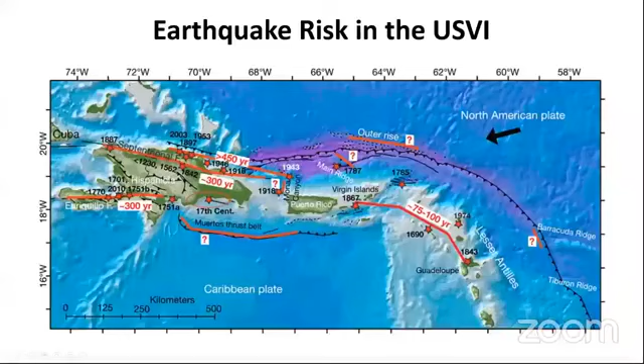So this here is another representation of all the earthquakes that occurred around us, with magnitude greater than 4.5. You see Puerto Rico definitely affected. The Virgin Islands has been affected, and the BVI in particular has been also quite affected. All those little stars and dots represent different earthquakes that occurred.

As you can see here, we've had a lot of earthquakes of magnitude greater than 7 that can be quite devastating. The more recent one that happened in Puerto Rico in 2020 was approximately 6.5. So that earthquake, which caused a lot of damage, is actually not a major earthquake compared to what happened in the past.

What's interesting about these dates is that those earthquakes can create tsunamis. The 1867 earthquake and the 1918 earthquake generated tsunamis that created further havoc on the islands.

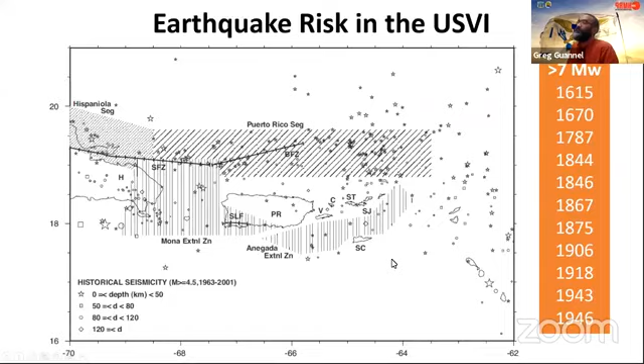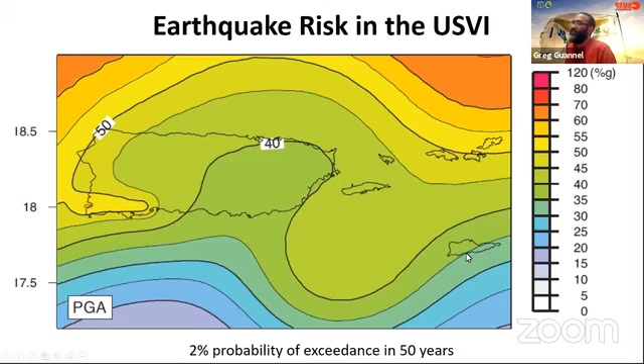So if you don't quite know what that means, let's compare it to the US. This is the map of 10% chance of recurring in 50 years for the United States. The regions in orange and yellow have a PGA of 15, 20, 40.

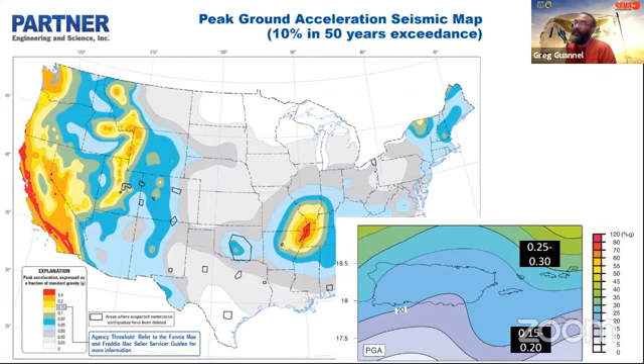We in the VI have 0.15, 0.2, and 0.25, 0.30 for St. Thomas and St. John. So what that means is that we need to look at the yellow to the orange, light yellow to the darker yellow and orange. It's not as bad as some places in California, but it is comparable to a lot of places in California, Washington, and Oregon State. This means that the earthquake risk we have can be quite damaging, especially compared to what has happened in other places in the United States.

Greg, the peak ground acceleration, is that like, what is that on the Richter scale? I will let my colleague, who will give their presentation, address this in a second.

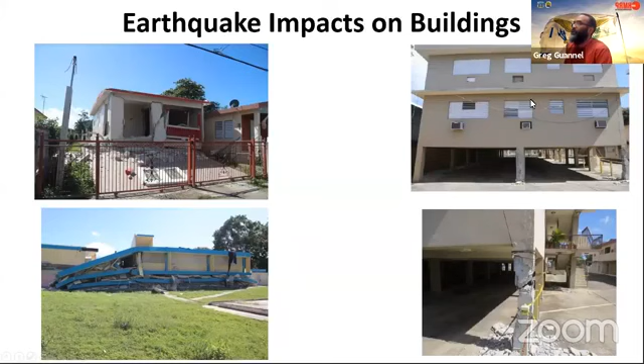So what does that mean in reality? These are pictures that were taken in Puerto Rico after the major earthquake they experienced. You can see the type of damage to houses and buildings, especially those built on stilts. A building can look fine, but the support structure can be quite damaged, as you can see in those pictures.

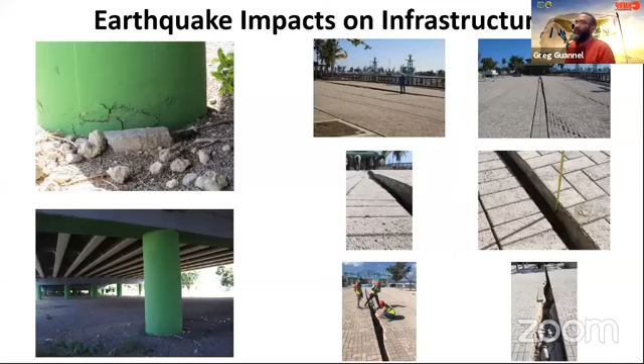It can also happen to infrastructure. Here are the pilings for a highway that are damaged, which will then threaten the integrity of that structure moving forward. These were taken in some public plazas, and you see the type of displacement that occurs, mostly because of the type of soil that was below it. Hopefully my colleagues from Puerto Rico and Trinidad will discuss more how this can happen given the type of soil you have.

So what does that mean for the VI? Well, as I mentioned earlier, we live in a very dangerous zone for earthquakes. Earthquakes have happened in the past, and they can happen anytime—today, tomorrow, or 10 years from now—but they can be quite damaging. When we look around in the VI, we ask questions, and hopefully our guest today will help us start creating answers. We see buildings that are made out of masonry, with support structures that are basically concrete blocks.

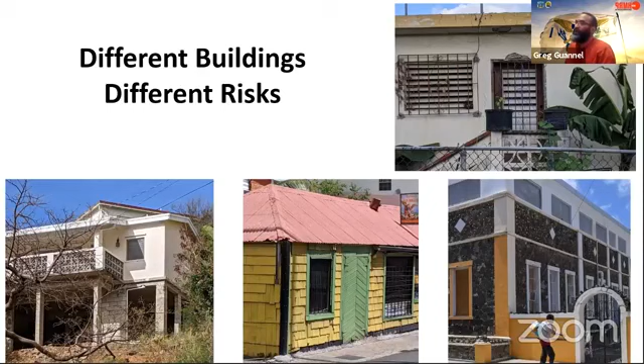From my point of view, that might be a problem, but maybe it's not. We also see structures made of wood, structures made of reinforced concrete, but the reinforced concrete is starting to degrade, probably because of the quality of the masonry when the structure was built. We also have very old structures made out of stone and concrete on top. There are all types of different structures here in the VI, and those have different ability to resist or completely collapse during earthquakes.

We also have very steep terrain in the USVI. This is also not uncommon in parts of Puerto Rico because it's also mountainous. But we probably have a higher percentage of structures on steep slopes on St. Thomas and St. John because that's what our topography is in majority. So you see a lot of multi-story buildings made out of different materials, different quality construction types, built on very steep slopes.

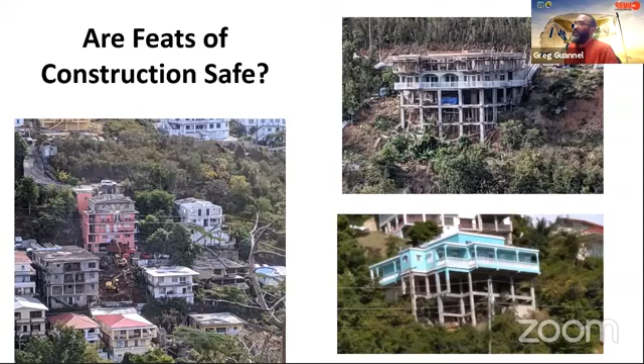And you have a lot of structures that are one or two stories high max, but built on stilts, and those stilts are one, two, sometimes three levels high. So when I see this type of building, it really makes me wonder: is it safe? What does that mean for the stability of these structures if we have an earthquake? Maybe it's okay, but this is the question we're going to be asking ourselves today. And if it's not okay, what can be done to either remedy, mitigate the problem, or ensure that it doesn't happen in the future.

So today I'm very excited to have two great speakers to talk about earthquake risks in the VI, and what that means for us to either mitigate against earthquake risk, or in the future prevent earthquakes from creating any type of damage to the homes and infrastructure that we have here in the Virgin Islands.

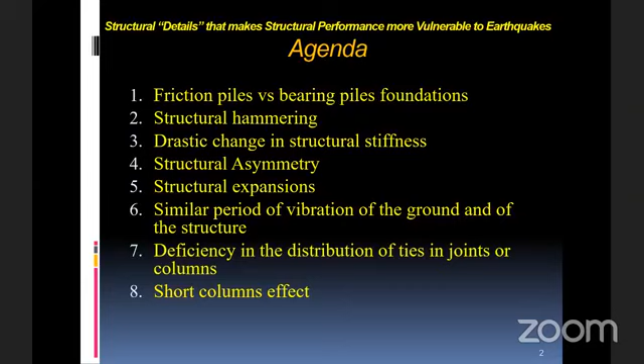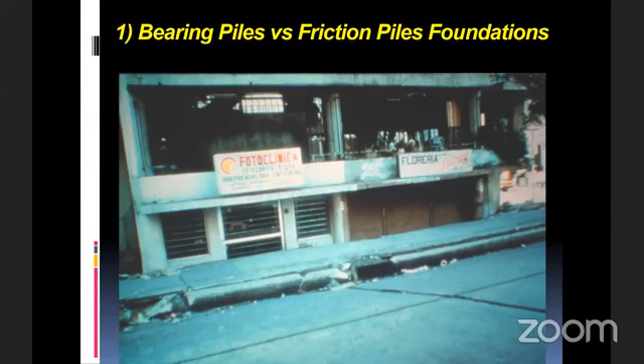So you might wonder, in the case of bearing pile and friction pile foundations, why some structures sink during an earthquake, like this building in 1985 in Mexico, which sank about 4 or 5 feet. While in other cases, like this one in Japan in 1980, this structure, basically a basketball court, looks like it increased about 18 inches.

What happened is that both structures are built on piles. The structure on the left is on bearing piles, which means the piles go directly to the bedrock, so all the weight of the building is transmitted directly to the bedrock.

Or you have the other case, a structure on friction piles, where the load of the structure is transferred to the ground through the friction between the piles and the ground. So if you have two structures in alluvial soil types, like this one here, most probably when you get the earthquake, the alluvial soil is going to settle down.

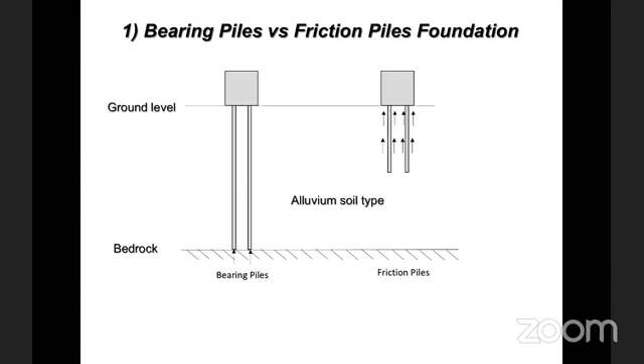Then you will have something like this, where the original ground level was this one here, and now because of soil settlement it goes some feet down. So in the case of the Japan building, the one on bearing piles will look like the building is increasing, it's growing. While in the case of the Mexico building, which was on friction pile foundations, the structure will sink a bit more because you have this soil settlement and also the structure itself will settle into the ground.

So I'd rather have the bearing piles case instead of friction piles. I usually suggest people do your best to reach the bedrock, which I understand is not that simple all the time.

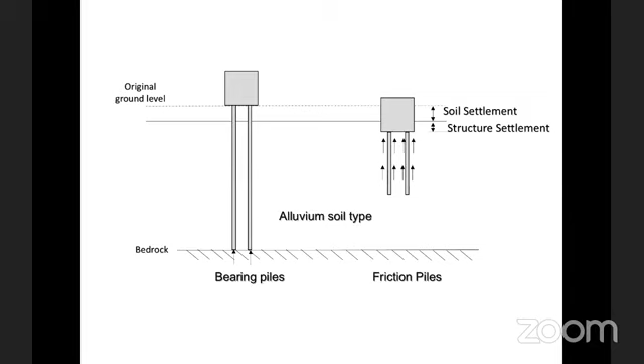In the case of structural hammering, that's very common in Mexico. You see the Hotel de Carlo, the building at the center of this slide. As you can see, one of the intermediate stories failed, and it was because of the hammering with the structure at the left, this small one, not the big one. These structures are so close to one another that they start hammering one against the other.

And in the case where you don't have the slabs on the same level, one slab is going to hit the column of the other building. That column is going to fail, and then that failure is going to propagate through the whole floor. But in other cases, like the next one, this is the detail of the previous slide here.

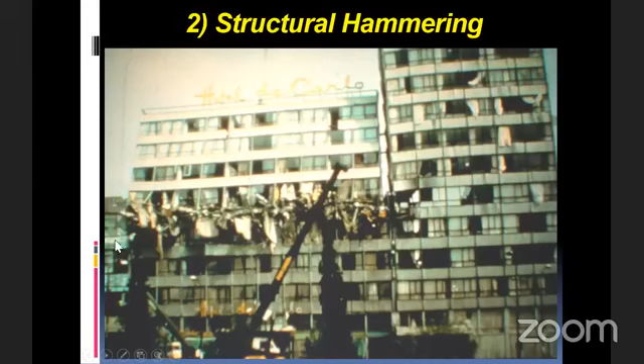In the case of abrupt change in structural stiffness, which is pretty common all around the world, you can see this building from the 1979 Imperial Valley earthquake. The building is a 6-story building that has a very stiff wall from the 2nd floor to the 6th floor. But then the structure on the 1st floor is supported by columns, and even worse, the columns are not in the same plane as the wall, they're shifted to the inner side.

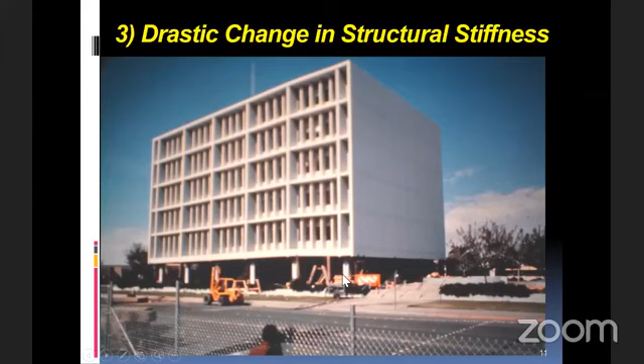So all the shear that comes from this wall has to go through the slab and then down through the column. The structure didn't collapse, but you can see the damage on the columns in the bottom part.

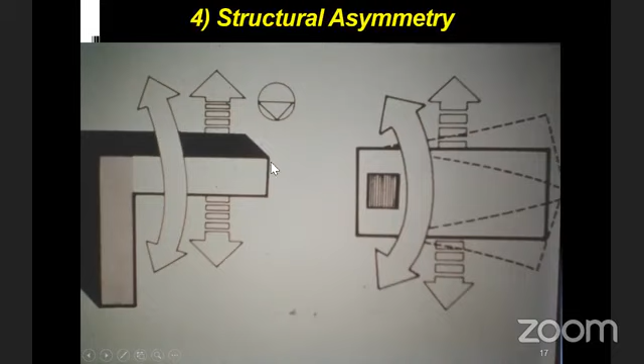The same thing happens in this L-shaped building, where in this direction the building is very stiff. However, in this wing, when the seismic wave comes in this direction, this structure will move a lot. So what people usually suggest is to have a very big, good structural wall at the end, or maybe some bracing in the case of structural steel.

You can see this case in Managua, Nicaragua. This was December 23, 1972. We have two banks here, Bank of America and Central Bank. The Bank of America is a 17-story building, and the Central Bank is a 15-story building. Let's see the American Bank first. You see the drawings, which show a square building, symmetric in both orthogonal directions, with columns all around the perimeter, and elevators and stair core in a symmetric way.

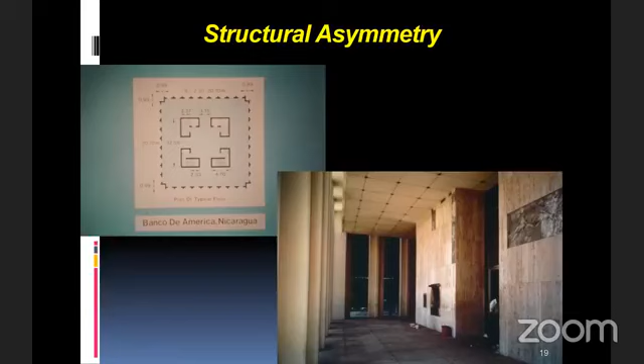So all the damage that this building had during the earthquake was that some tiles failed here on the first floor, so that was no problem at all. But in the case of the Central Bank, which is a rectangular building, having columns on the perimeter on three sides, but having the elevator core at the left side of the structure - the structure didn't collapse, but you can see how the stairs ended up having a lot of debris.

The structure had a lot of damage, and at the end they decided to tear down the last 12 stories. So today this is a 3-story building, while the other part is still there. So it's very, very important to try to reduce the amount of torsion that is introduced in a structure.

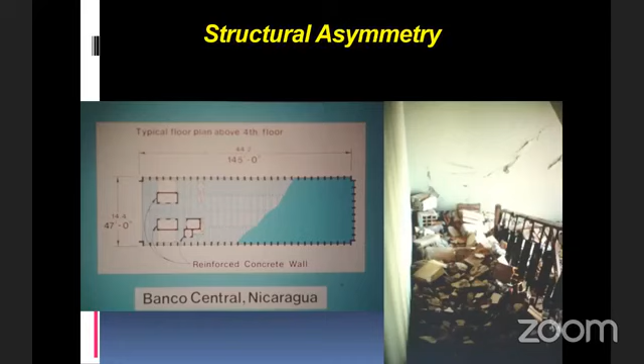In the case of similar period of vibration of the ground and the structure, this happens a lot in Mexico. This is a very particular case because the ground in Mexico has a period of vibration of basically 2 seconds. So structures that have that period of vibration, or a little bit less, have a lot of problems because they can enter in resonance.

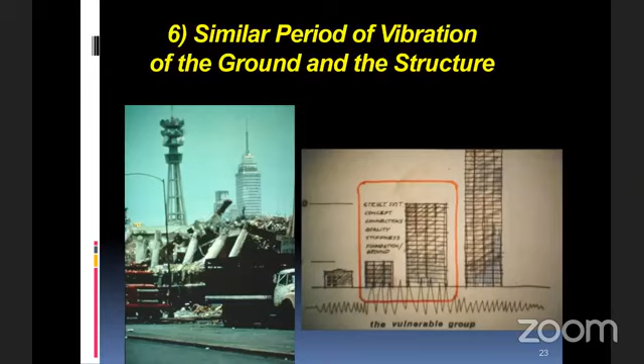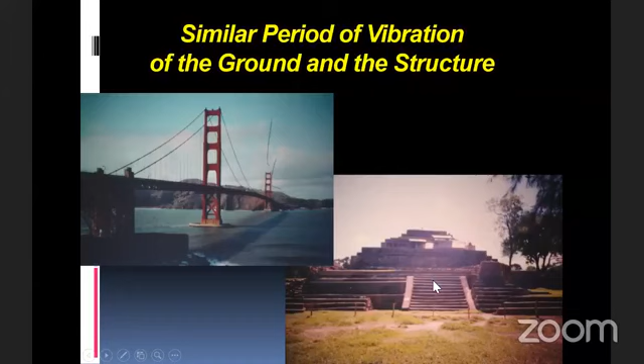For example, the Golden Gate Bridge has a period of vibration of about 11 seconds on the deck, so it won't have any kind of coincidence with the seismic wave. Neither will this pyramid, which is very, very stiff, have any type of coincidence with the seismic wave. They can have other problems, but not coincidence in period of vibration.

Regarding the deficiency in distribution of ties in joints, this is something very important. I remember when I studied here in Puerto Rico in my bachelor's, I never learned how to design the joint. Joints were not part of the class.

It seemed that happened also in Venezuela, because this picture was from 1967. You will see the columns that look to be in good shape, but there was no connection, not good development length at the end. There were no ties there. And this is the type of collapse that you get when you don't design your joints properly.

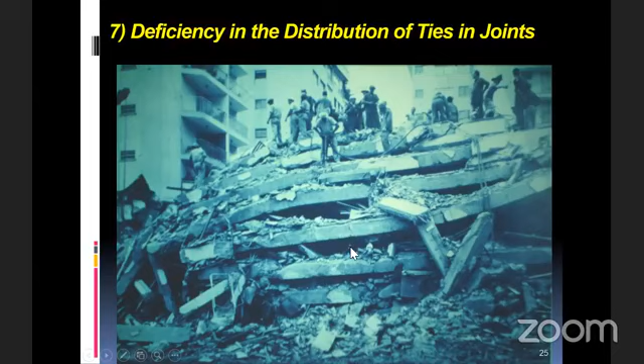In 1997, also in Venezuela, they got an earthquake, 6.2 or something like that, in the area of Cariaco. You see this is the only school in that town of 15,000 people. The first story collapsed, and about 33 people died, considering students and teachers.

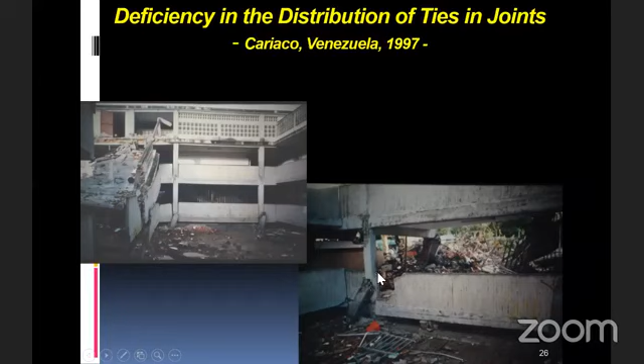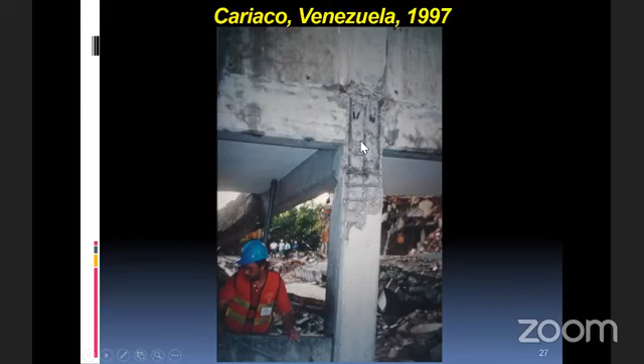If you stand here and take a picture toward where we are, you will see this other side. You can see this column that collapsed here; there is one story missing here. In the next picture we'll show a detail of this connection. You will see they have ties in the column at 4 or 5 inch spacing, but when you reach the beam here, there are no ties anymore. The amount of stress the joints are submitted to is very large, and that might explain why this school collapsed.

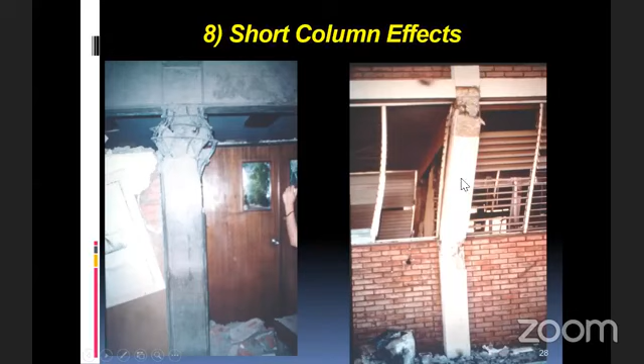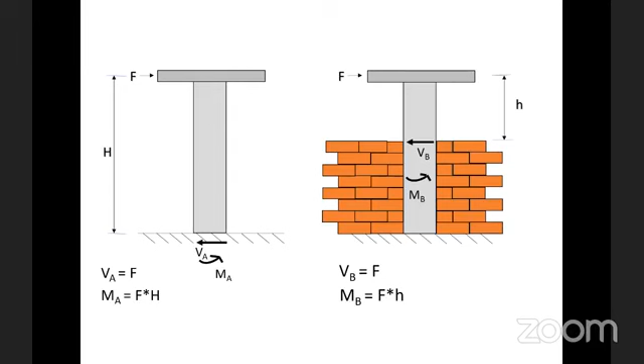So this is in the Agripina Seda School in Guánica on January 6th after the 5.8 earthquake. There were column failures here by shear, very clear. You can see this masonry wall with this shear crack and the columns also. And then the next day we got the 6.4 and it completely collapsed the school, okay?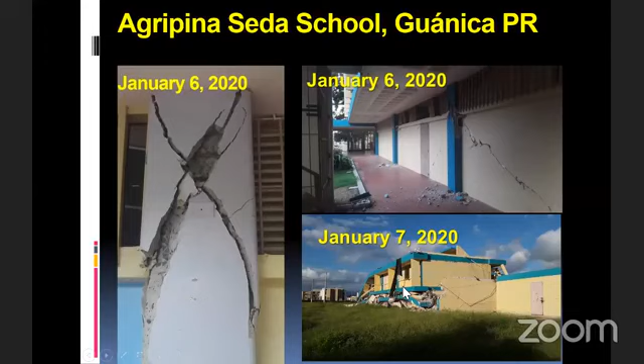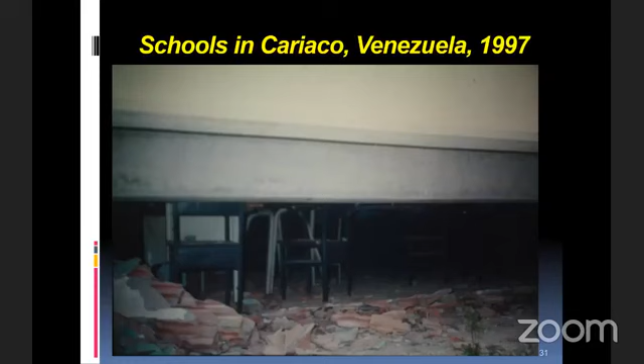So it's very important in this case that if you are in school, you always throw yourself on the floor, put your head under the desk, grab the legs of the desk and start praying, okay? Because having that amount of desks, most probably those will be able to support the roof, okay? So that's what I have so far for you, okay?

Thank you so much for this great presentation. I just want to address the quick question that Kimiko asked during my introduction. Would you mind maybe clarifying the difference between what scientists measure and use for design, which is the peak ground acceleration, versus what is reported, which is the magnitude on a Richter scale?

Well, okay, the peak ground acceleration will depend not only on the magnitude of the earthquake, but also on how close you are to the epicenter, and also on the type of ground that you are on, okay? So you can have a very big earthquake, let's say a 9.2 or 9.4 like we had in Japan and in Chile, but we didn't even feel them here in Puerto Rico or the US Virgin Islands. So those were very big earthquakes, but they are so far away that you don't even feel them, okay?